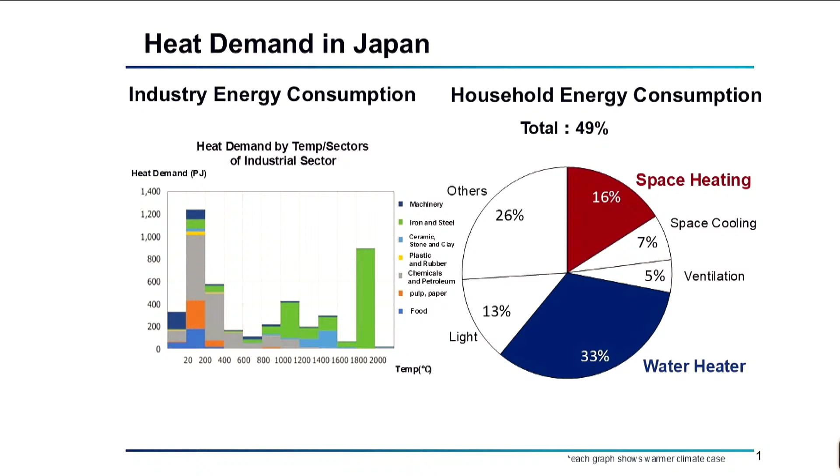Heat pumps not only improve energy efficiency, but also enable a shift from gas to electricity, contributing to the transition to non-fossil energy. Japan is accelerating the introduction of heat pumps through both large-scale budgetary support and incentives, and regulatory systems. So pushing and pulling.

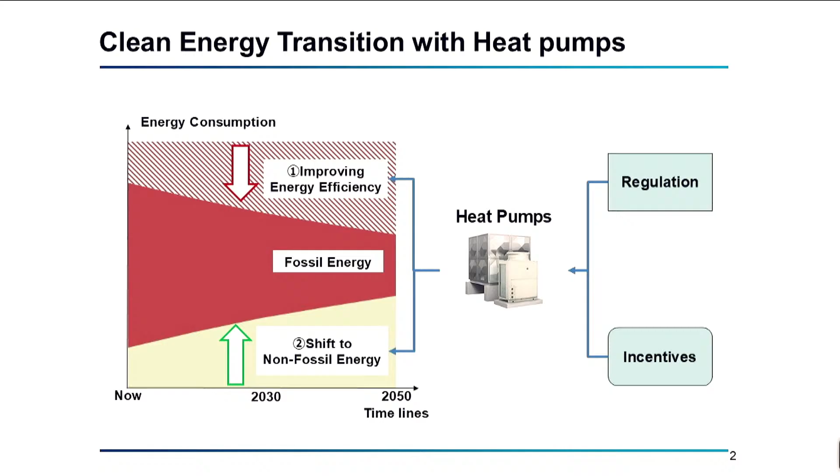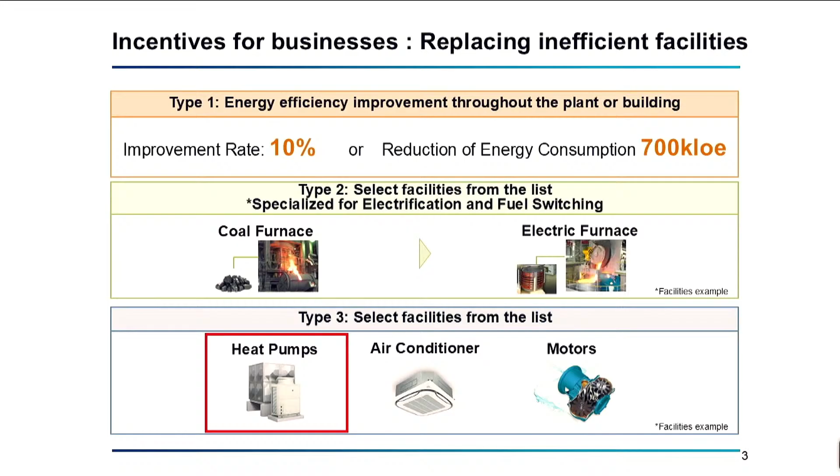Since last year, Japan has introduced governmental support of over $5 billion for a 3-year period. This applies to 3 categories: one is energy efficiency improvement across entire factories, for large-scale investment. Category 2 is fuel conversion, and 3 is replacing individual equipment through support. We encourage investment including in small and medium-sized enterprises, especially using category 3.

In tandem with the support mechanism, regulatory frameworks are important, and we implement the unique Top Runner program. The Top Runner program sets energy efficiency targets and target years based on the best technology of the time. Heat pump manufacturers and importers are required to meet these targets by the designated target year. This is a moving target, so after several years there's a much higher standard as a new goal.

This moving target system is very effective as it stimulates technology innovation. Every manufacturer has to develop something new every day. In the case of air conditioners, we have a record of gaining 30% energy efficiency improvement over the past 20 years.

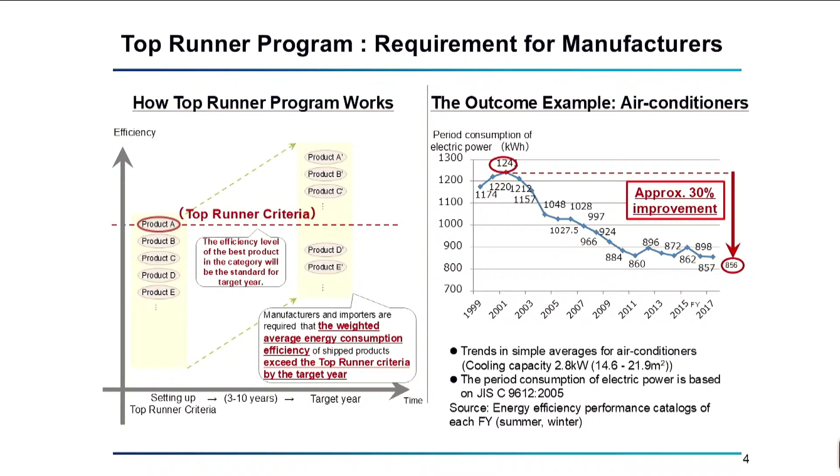Facing rising energy prices, reducing electricity and fuel bills is crucial. We are promoting the replacement to highly efficient heat pump water heaters through government support, and this has stimulated demand. The demand has also led water heater manufacturers to expand their production lines.

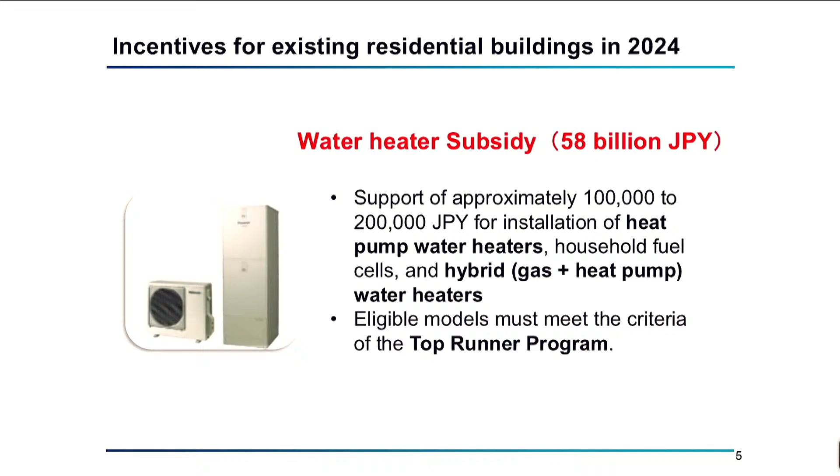We have witnessed a significant shift from traditional gas water heaters to highly efficient heat pump heaters. Today, the share of highly efficient models accounts for 52%, up from 9% 20 years ago. The installed number of highly efficient heat pump water heaters has exceeded 10 million units.

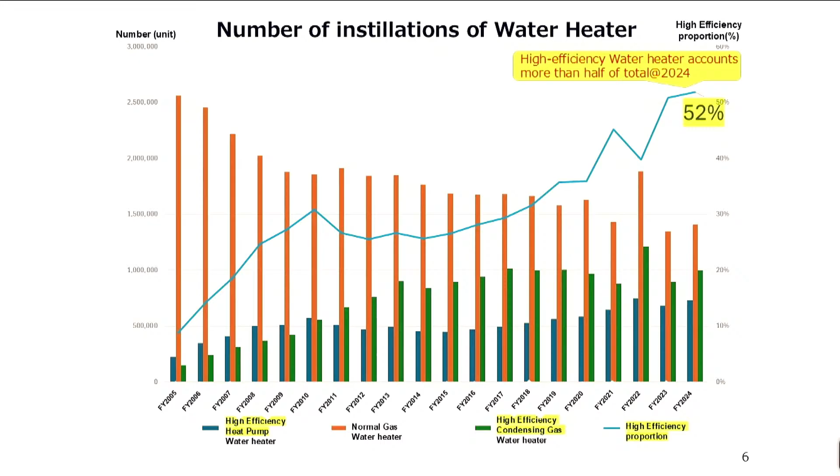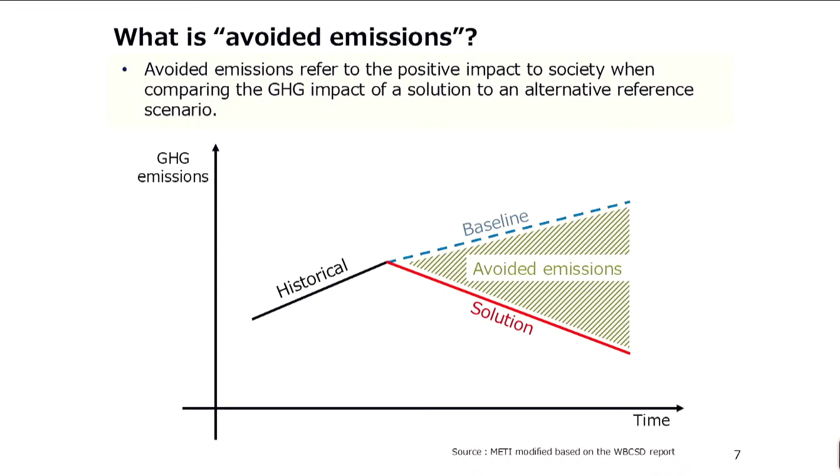Lastly, Japan is working closely with WBCSD, the World Business Council for Sustainable Development, to develop a new emission accounting concept. We call it avoided emission for energy efficient technology, including heat pumps. Avoided emission quantifies the positive impact of greenhouse gas emission reduction achieved by a certain solution compared to the baseline scenario without the solution. Using avoided emission as a new metric will allow companies and financiers to prioritize projects or investments with more reduction impact.

You can see the baseline is the conventional gas heating system. It emits a lot of CO2. If you change to heat pump, then obviously there's substantive emission reduction.

For example, for the manufacturer Daikin, they manufacture a lot of heat pumps, but under the conventional scope 1, 2, 3 mechanism, the more Daikin produces heat pumps, the more activity, so scope 1, 2 goes up. But that's not the value of Daikin - they are reducing the emission of the whole society, the whole economy. This new metric of avoided emission tries to count that positive side, the value of the company.

WBCSD is now incorporating avoided emission with the conventional greenhouse gas protocol, or scope 1, 2, 3 accounting system. Japan supports this initiative so that the effectiveness of energy efficient technology is properly evaluated worldwide. We need an international standard for this.

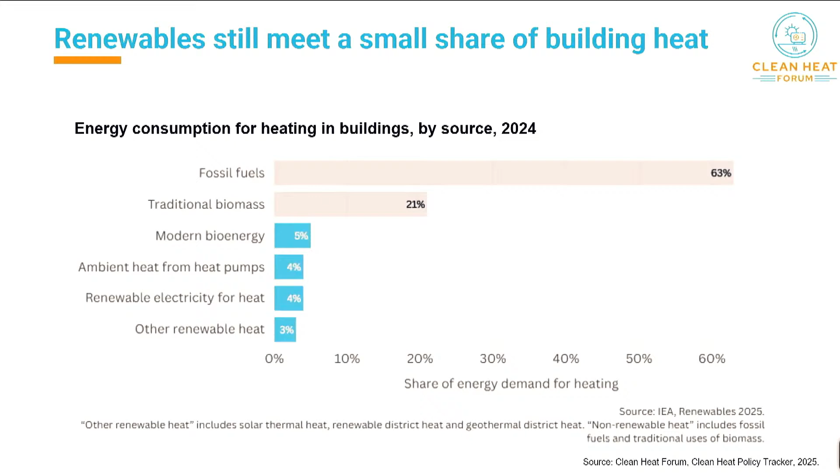We know that there is still a great need to decarbonize heating in buildings. In terms of energy consumption for heating in buildings, renewables still meet a small share of building heat, around 16%, with most of this taken by modern bioenergy. However, a rising share is from ambient heat from heat pumps as they're being deployed around the world. As the share of ambient heat from heat pumps is rising in energy consumption, we know that heat pumps are a key building technology for heat decarbonization.

The IEA found that heat pumps globally have the potential to reduce CO2 emissions by at least 500 million tons, roughly equivalent to Canada's emissions in 2021. You can see this in the chart. Even under the announced pledges scenario from several years ago, heat pumps go a long way towards reducing emissions in buildings.

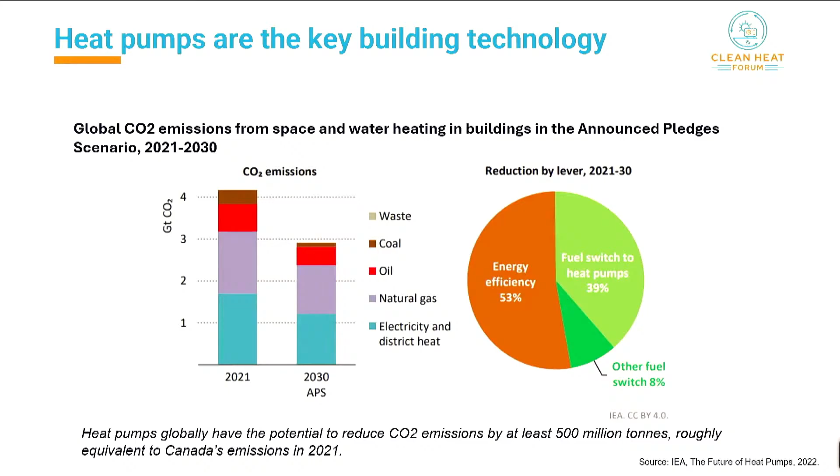The Clean Heat Forum plays a role in this by trying to accelerate the decarbonization of buildings by working with national governments, NGOs, and industry. As mentioned, it was created in 2021 at COP26 in Glasgow. We work on sustainable heating practices and trying to share best practice policy among our members. We focus on making the heat transition affordable and making sure that governments have adequate support to meet a rapid and equitable shift to clean heating.

This year, in the context of heat pumps, the Clean Heat Forum has had two notable outputs that I would like to discuss briefly today. The first is a policy brief on how to make electricity cheaper around the world. This is coming soon in the weeks following COP. At the end of October, beginning of November, the Clean Heat Forum and RAP published the Clean Heat Policy Tracker, the 2025 edition. I'd like to walk through some of the results from this study and talk about how governments are approaching heat decarbonization around the world.

Let's begin by speaking about energy prices. What we know, what we see in trend lines, is that low price ratios tend to lead towards more electrification. A price ratio in this context is the ratio of the electricity price to the price of the fossil fuels used for heating. That could be the ratio of electricity to natural gas, the ratio of electricity to heating oil. It depends on the region concerned.

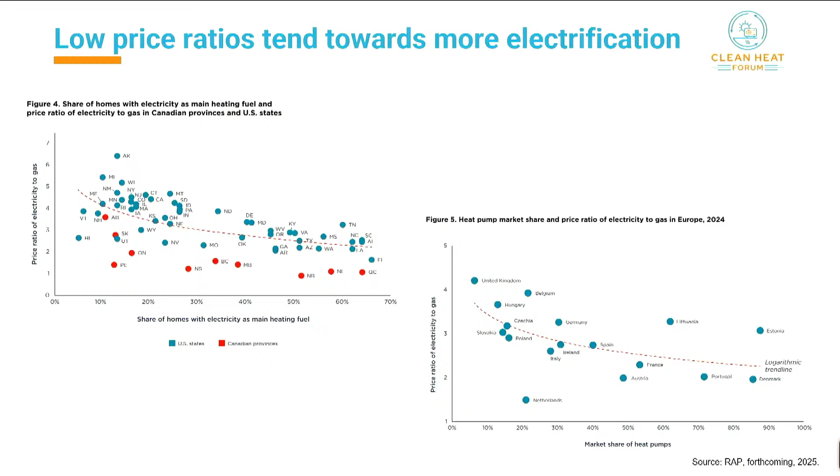You notice the Netherlands here is a bit of an outlier, because the Netherlands has taken strides to greatly reduce its price ratio to boost the heat pump market, which has had good results in recent years. But you can see that's why it's a bit of an outlier in terms of this trend. However, in many countries, the trend holds that the lower the price ratio of electricity to gas, the higher the market share of heat pumps.

This can also be represented in a map. When we look at the price ratios across Europe, again, we can set some boundaries. So we say a good price ratio for electrification is around 2.5, because you know that if your coefficient of performance is around 3 or 3.5, which could be considered standard performance in these European conditions, we know that the heat pump will be a winner on running costs if the price ratio is less than 2.5 almost all the time. Those are the countries in blue.

Once you get between 2.5 and 3.5, it starts to become a little bit less certain whether your heat pump will deliver cost savings. And once you get up to more than 3.5 of an average price, that starts to be where it would potentially be more expensive to run the heat pump. There are ways around this, such as using dynamic tariffs to make sure you're running the heat pump at times of low electricity prices. But of course, the best way forward is to simply reduce the prices of electricity overall, especially relative to gas.

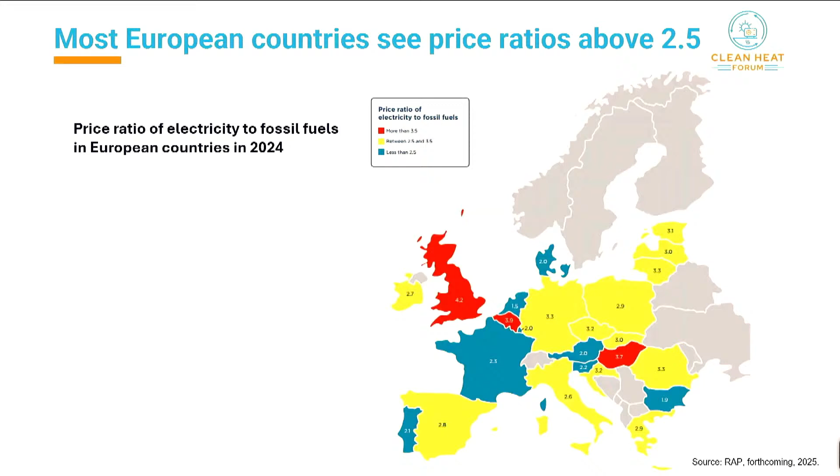For this report on energy prices, we also looked at Chinese provinces, and we saw that there's a great range of electricity and gas prices, but generally the price ratios tend to be very low. You can see on this chart, the highest one is around 3.1, and many price ratios are below 2, certainly below 2.5, almost all of them, with the exception of 3, are below 2.5. So there's a strong economic case for electrification in China.

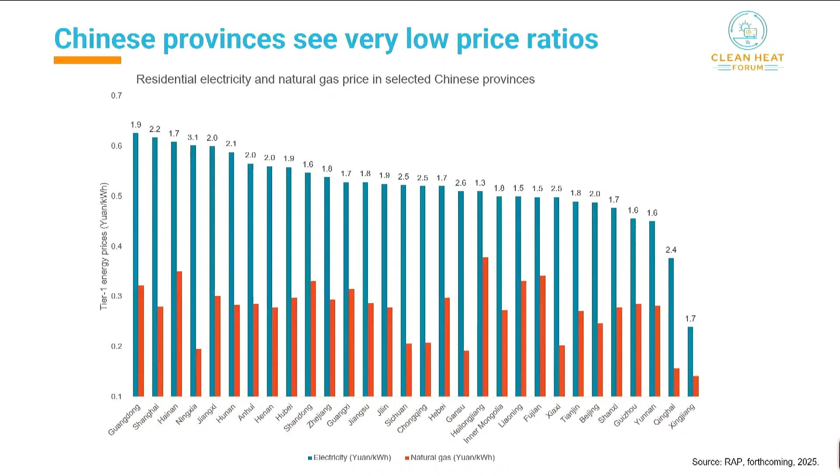That concludes our discussion on prices, and now I'd like to talk a little bit about policy frameworks and work we've done in the Clean Heat Forum on tracking policy frameworks.

We did a review this year of 17 countries, about half of which are in Europe. We also covered Canada, China, the United States, South Korea, and Jordan, in terms of countries outside of Europe.

We tried to see comprehensively which policies are most common in which countries, what strategies governments are taking to decarbonize their heating, and what is the best practice in these policies. So to do this, we did an overview that looks at the general trends.

We looked at policy fact sheets. You can see on the right side here, we grouped them into 5 categories: overall policy framework, regulatory policy, financial support policies, pricing reforms, and communications. We tried to highlight some of the best practices from the 17 countries we reviewed, so that any country looking to dive into heat decarbonization can turn to this policy tracker to see some of the best practices from around the world.

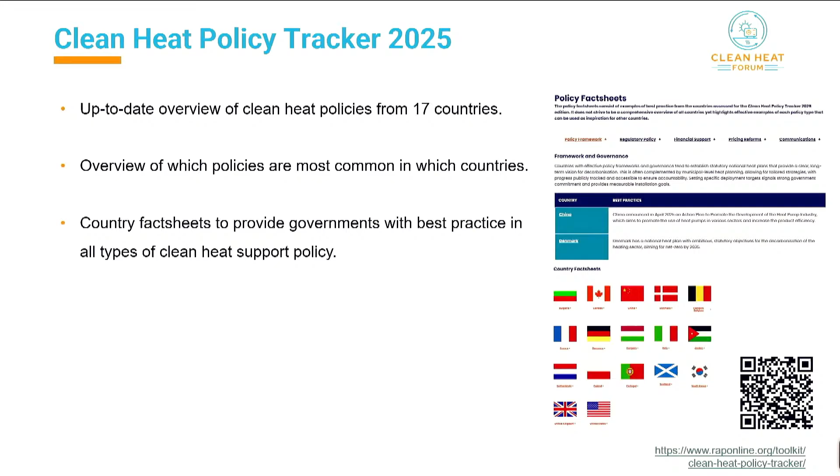When we look at the results of our survey, we find that subsidies are the most common policy lever. Indeed, in almost all countries, we see some sort of subsidy for clean heating in place, whether it be heat pumps or district heating, or different technologies which don't feature here but can be understood as part of the clean heat portfolio. Many countries also have communications campaigns that try to improve public understanding or track heat decarbonization publicly.

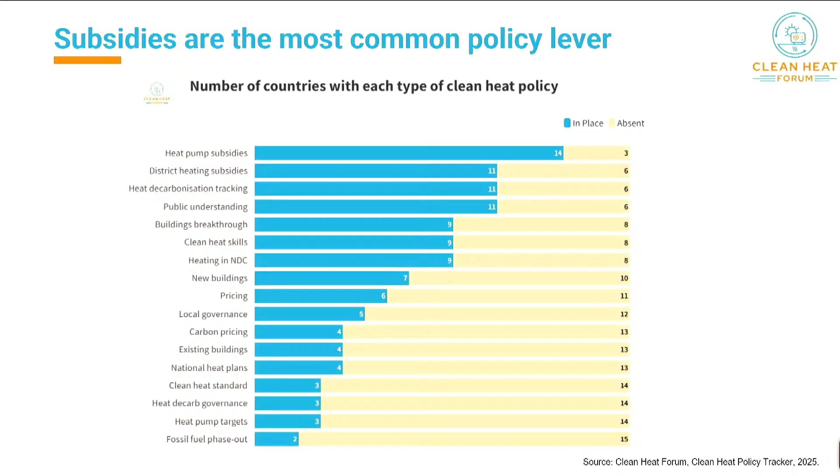Yet, as we go down the list, we see that we're lacking comprehensive frameworks for heat decarbonization. Not a lot of clear and binding targets for fossil fuel phase out or for heat pumps, lack of clarity on heat decarbonization governance, a sort of national heat planning. It's really mainly dominated by subsidies.

So when we look at this in terms of the 5 categories I mentioned earlier, we can see that financial support, as mentioned, is by far the most common. Governments are keen to provide these incentives to try to bring down the upfront cost of the technology, but they're lacking the strong regulations to make sure the technologies are being taken up, or the sort of frameworks and long-term vision that can guide the sector, guide investments, reinforce the industry, and encourage households to make these sort of investments.

And we don't see much action on pricing reforms either. As mentioned previously, we have a lot of very expensive electricity in different countries around the world. We have gas and fossil fuels that remain cheaper. The price ratios are not good. In many cases, carbon pricing is not in place. These are long-term strategic mistakes that countries will need to rectify if they want to see quicker decarbonization of heating.

So to conclude, we know that heat pumps are the key heat decarbonization technology in buildings. They will be a heavy lifter in terms of getting us off fossil fuels and how we heat our buildings. The approach by countries is largely still to spend money to provide incentives and let the industry figure out the rest. We don't think this is a great approach because it's lacking the long-term vision and structural support that's needed for the industry to have confidence in its investments, and for households to be encouraged to make their own investments.

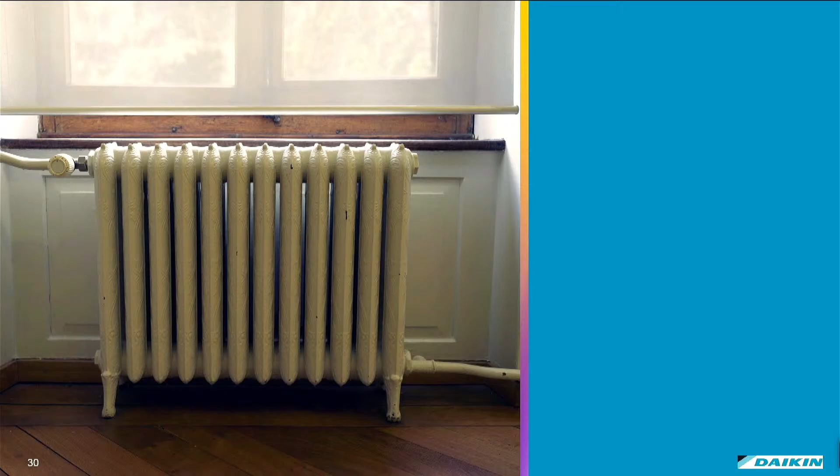As we all know, Europe is often referred to as the old continent. If you go to the next slide, we can see why that probably is also the case within the building environment.

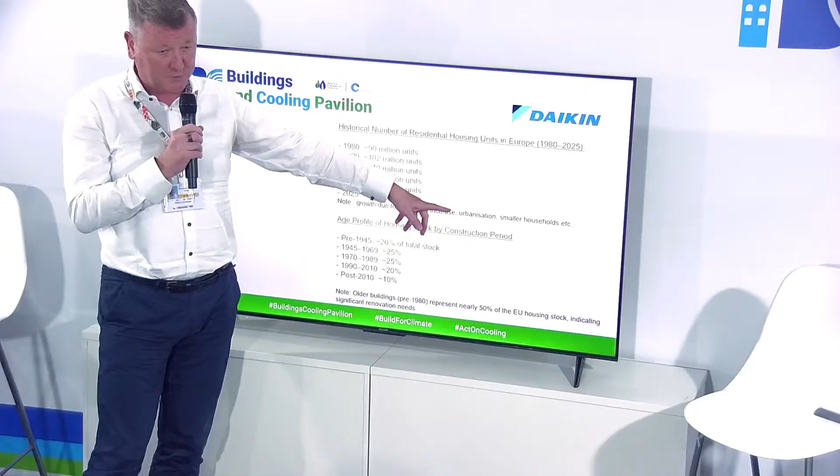We have a range of population that is growing, a historical number of residential buildings that is growing. In the 1980s we only had about 90 million residential dwellings, whereas by 2025 we have almost 250 million residential dwellings - these are separate houses, apartments, really the total overview. Mainly due to population growth, urbanization is an important factor, and smaller households are becoming more and more popular - one-person, two-person households - whereas before, in the 1970s and 1980s, people were living 5, 6, 8 people all together. This is really not the case anymore.

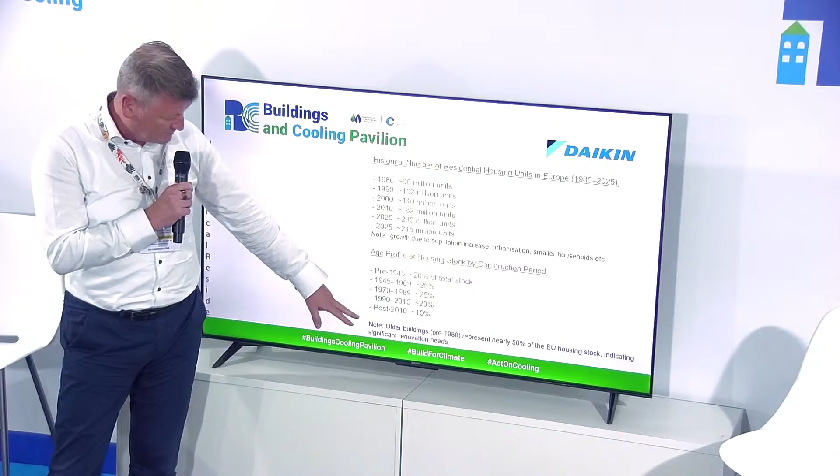This translates into a very old building stock. You could see that almost 50% and more of our buildings in Europe date before the 1980s. Now, to be honest, most of these buildings along the lifetime have had some kind of renovation, otherwise they wouldn't be there anymore. But nevertheless, it is an old building stock, especially since post-2010 only represents 10% of our building stock. So we will have to do mostly work on renovation.

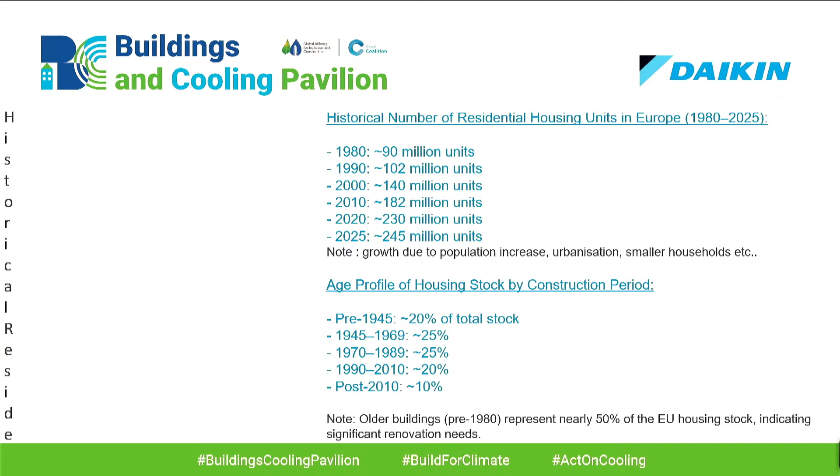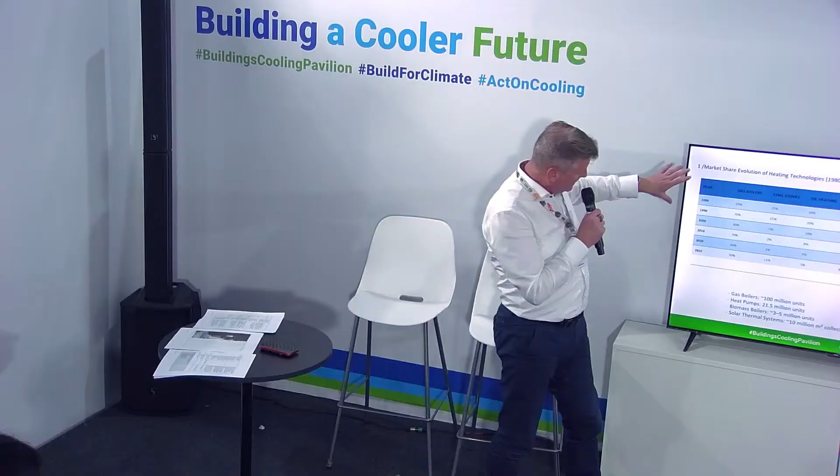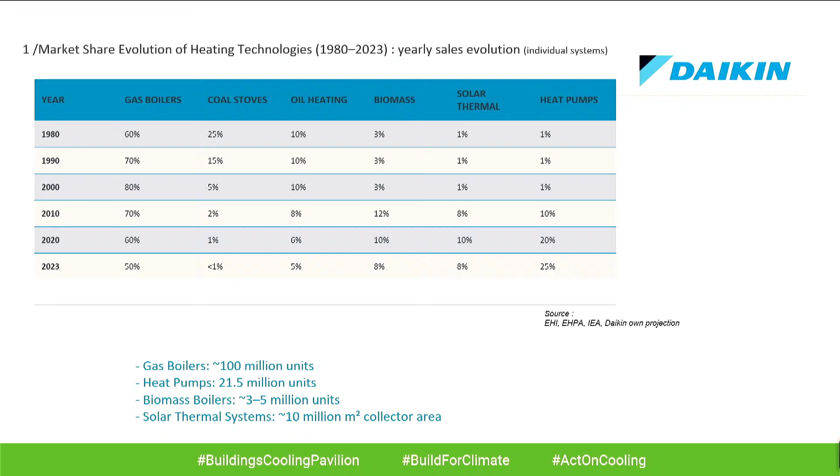Over the years we do see a gradual evolution in the type of heating systems being used. If you look from the 1980s onwards, pretty much gas remains more or less stable - it goes up a little, down a little, but the overall tendency is stable - whereas heat pumps are growing, but are mainly replacing the high carbon intensive fuels like coal stoves and oil heating. We are not yet tackling very much the existing stock of gas boilers.

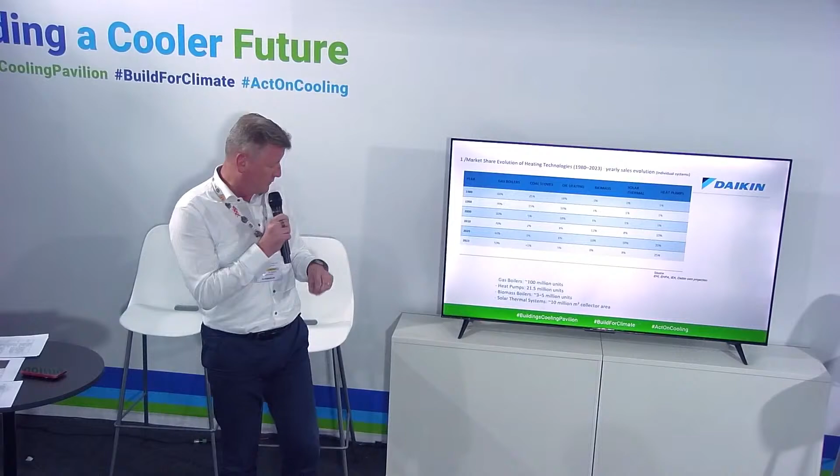That translates into these numbers: we have about 100 million gas boilers running in Europe at this time, and about 20 million heat pumps - these are air-to-water and air-to-air heat pumps, mostly used for heating, so that's the combination of those two numbers. Still about 3 to 5 million biomass boilers, but altogether the challenge remains in how we get rid of the stock of mostly old gas boilers. This is our main challenge.

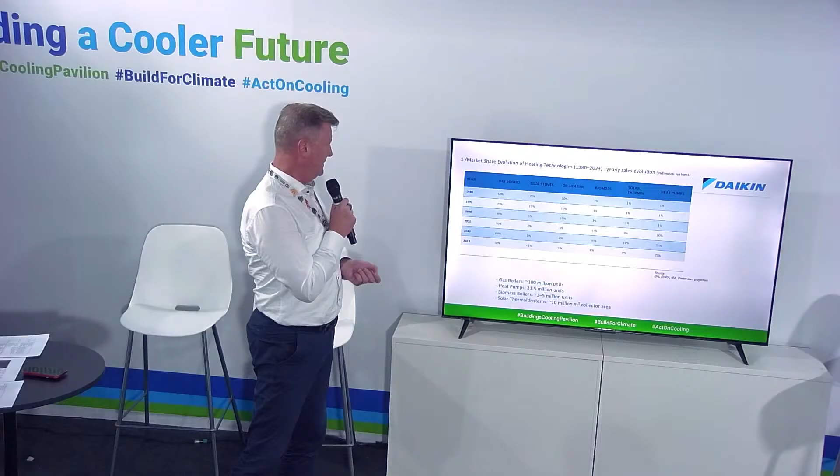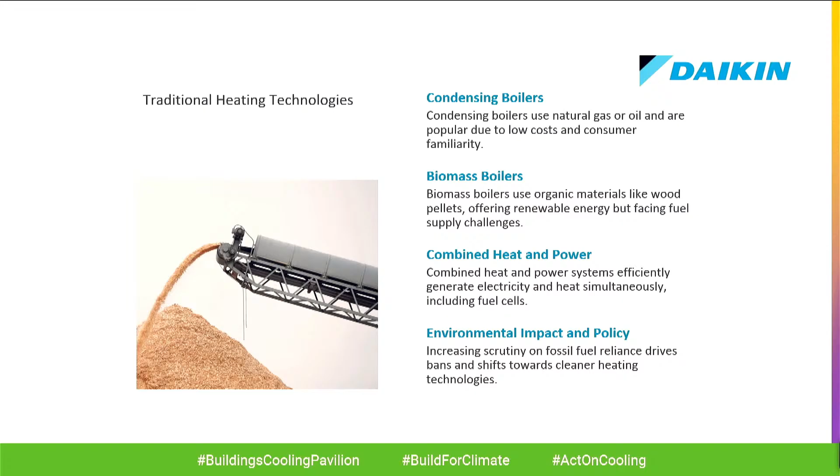Let's look at the technologies and tendencies we actually see happening today. We have the traditional heating systems, which nowadays are mostly condensing boilers, and within Europe you hardly can sell non-condensing boilers anymore due to legislation. We have biomass boilers, and a small level of combined heat and power units. This has an immediate impact on the scrutiny towards these technologies and how we can achieve these predominant technologies becoming more carbon neutral.

There is a way forward - some of these systems in time could rely on cleaner fuels, but this is a tendency which is very long term and we really don't see too much happening at this present time. Next slide is then the evolution.

We do indeed see a shift towards more sustainable heating - gradually a shift from boilers to sustainable heating and heat pumps, but it goes very slow, and this is the main challenge we are facing. Europe has climate targets, and already this week here at Belém, the EU Commissioner confirmed that these targets are in place, remain in place, and are not to be discussed. So this is a very clear message that Europe remains committed, but there are also economic and market factors we need to address, as already highlighted before by the person from RAP. We have problems with gas prices, electricity ratios, which are not always in favor of moving in the right direction.

This is indeed the gap between electricity and gas which is, in most cases, creating one of the bottlenecks. We'll come back to that later.

An interesting factor we do see happening, also highlighted in the previous presentation, is the move towards more smart systems. Even if the gas to electricity price as such is not interesting, if you have a smart tariff, if you can use your solar panels and batteries, you can have an integrated system that, despite all of that, can still be an economically viable solution for the private end user.

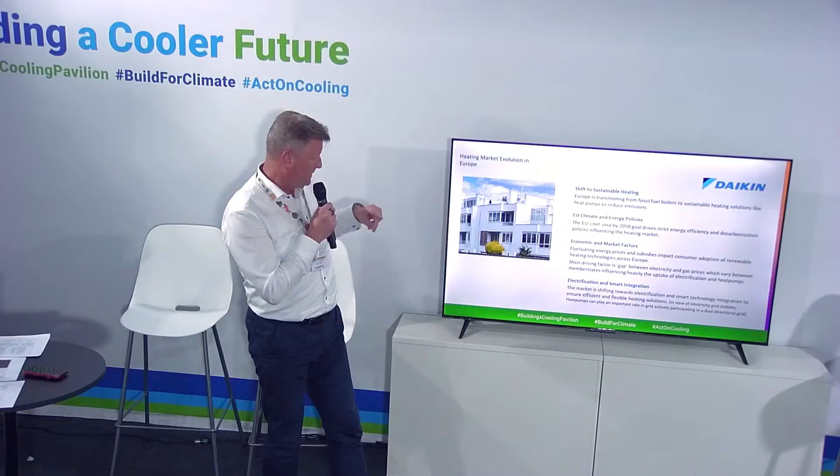Next slide. So indeed, we do gradually see a boiler market decline. We see over the last couple of years a decline of 4 to 6% of boilers on a yearly basis, which is okay, but it's too slow.

So the call is really towards stronger interventions by governments to push more towards the electrification of heat. We do see a small but relevant move towards electric boilers, which we also need to take care of, and I'll come back to that at the end of my presentation. If the electricity price at the end of the day becomes too low, people are also not interested to go to efficient solutions anymore, because it's not cost effective enough to invest in an efficient system if the electricity price is too low. We have data on that later on.

Next slide. Then let's look at heat pumps. As said often before today, heat pumps are on the growth. We do see market growth, however, it's not going fast enough, and we've seen major setbacks over the last years. The data that comes later will actually prove that.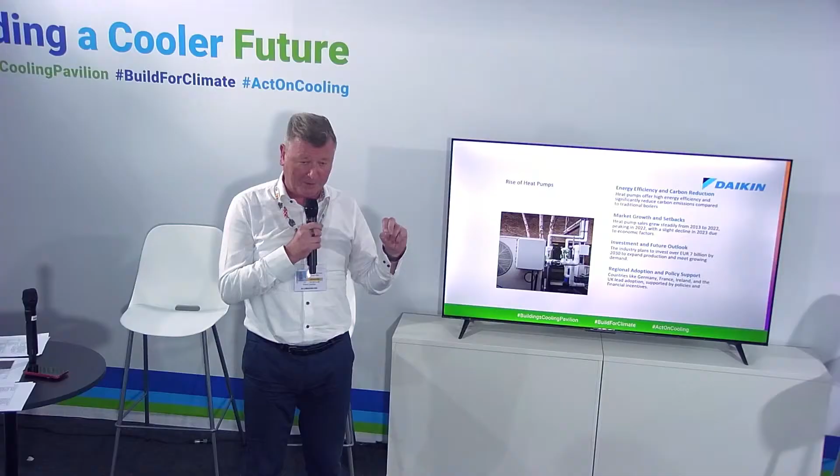We do need further investments, and in the Europe area, most manufacturers have committed immense investments in building up the capacity. So it's not about production capacity, not at all - it's really about rolling out and creating the market, which is now at stake.

Let's also look at air-to-air heat pumps, a sector which in Europe - probably not here in Brazil, but definitely in Europe - is often forgotten as a way forward. We do see coming up more and more, also in Europe, the need for cooling, hence the combination between heating and cooling systems together. It will always remain impossible for a boiler to cool, so it's always a discussion that if you do go for a heat pump, you have the two systems at the same time. At that point, the air-to-air heat pumps become a crucial factor in actually making this happen, combined with advanced technologies, the introduction of inverters and VRF systems, which allow a bigger scale-up of air-to-air as a way of heating and cooling our buildings.

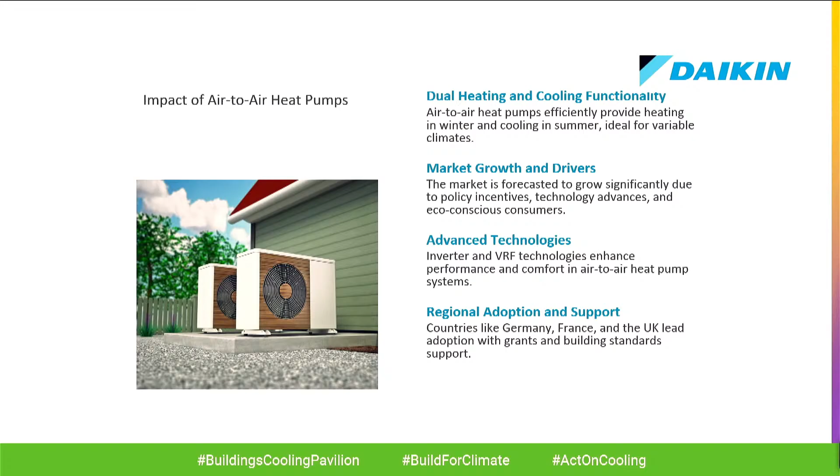Next slide. So yes, cooling demand increase is there. We see more and more longer summers. We have the effect of urbanization and heat islands - this was also discussed here at COP with Beat the Heat. It's one of these elements that is definitely in there. Overall, the HVAC market is growing, and we see a move towards more efficient cooling systems.

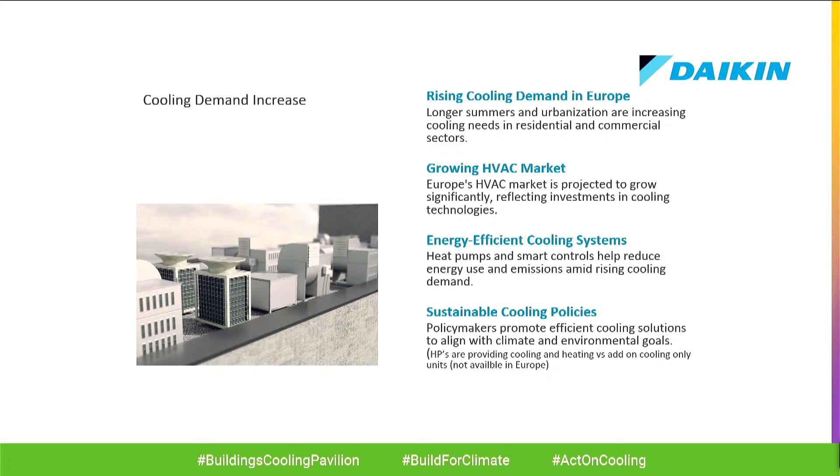Next slide. Now let's look at the background and the future outlook of what we can see. Next.

This is not coming through very clearly, I'm afraid. This is basically showing the efficiency levels between the different systems, and it's putting it very clear that there is no discussion about the fact that any heat pump is at least 2.5 to 3 times as efficient as a boiler. The more you go up the scale, you can go to heat pumps that are 4.5, 5 times more efficient, but in most cases you don't have to go to that level to make it economically feasible. So what we are saying is try to go for a system that is affordable to make sure the rollout goes fast enough.

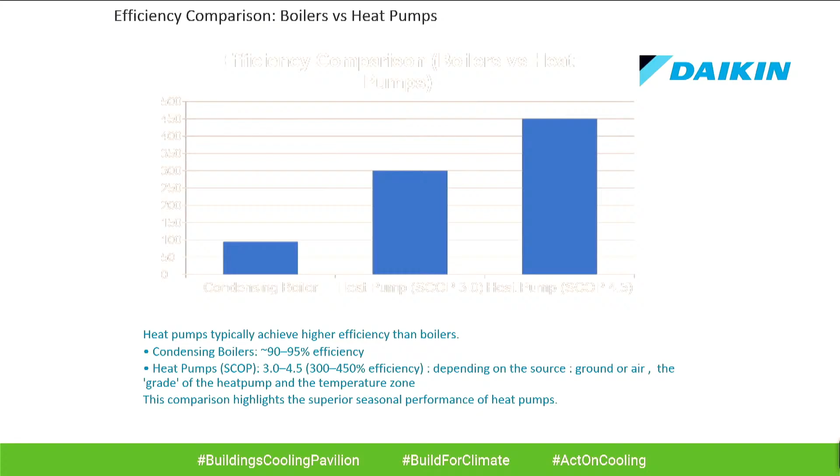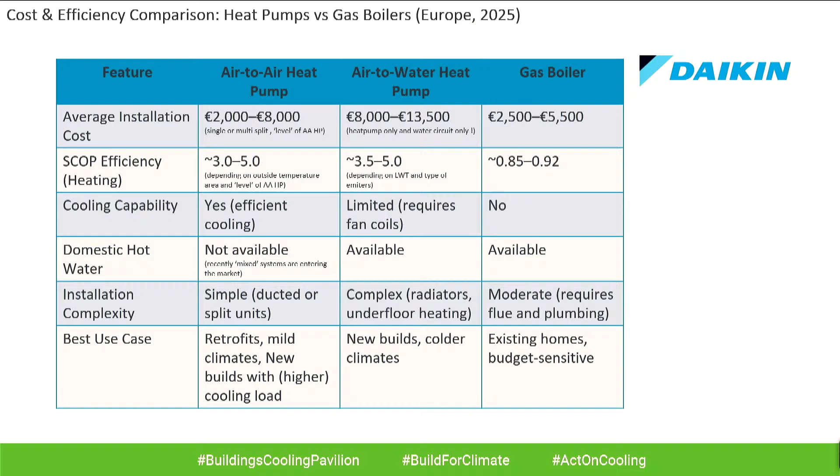Next slide. If we look at cost, and this is often the elephant in the room, yes, indeed, heat pumps are more expensive - there's no two ways about that. If we look at the different systems, a gas boiler in Europe goes somewhere between 2,500 and 5,500 euros - that's an awfully big spread, also to do with the countries, as there's a big difference in pricing by country. An air-to-water heat pump traditionally will be about 2.5 to 4 times more expensive than a gas boiler. The main point is that air-to-air can provide a cost-effective solution in quite a number of cases, especially if we are looking at cooling. So towards the southern part of Europe, we really believe air-to-air in combination with cooling can provide a solution.

What we are seeing more and more, and potentially even more important, is what we call mixed systems. We do see mixed systems coming into the market where air-to-air units are providing at the same time air conditioning, cooling, but are also providing hot water. It's these systems that we do see gradually picking up more and more pace in the market.

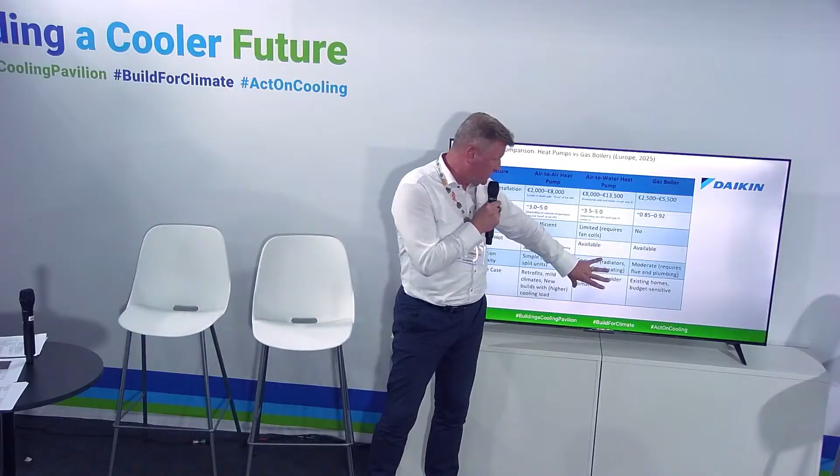It can be used in retrofits, whereas air-to-water heat pumps quite often are used towards new buildings because of the infrastructure that is needed and so on. Whereas gas boilers traditionally remain mostly used in existing buildings. And again, this is the main target of decarbonization over the next 5 to 10 years.

In fact, in some countries today that is the case. For the first time in Germany this year, there are more heat pumps being sold than boilers. So it is starting to happen. However, we do have to take care of these ups and downs in the market.

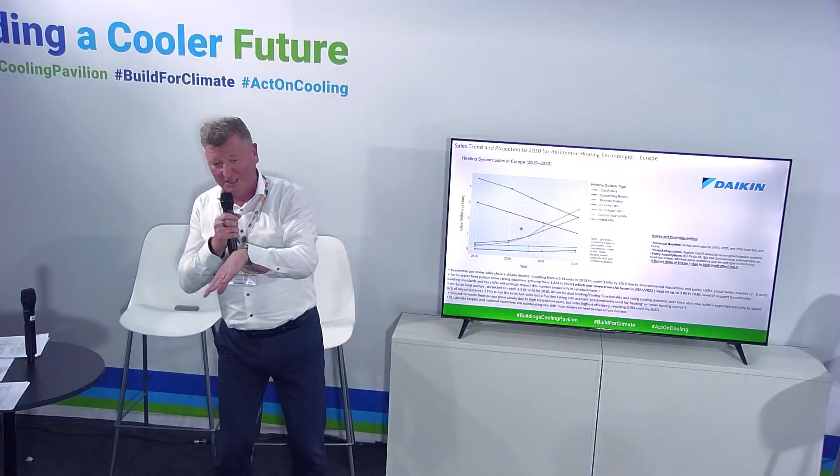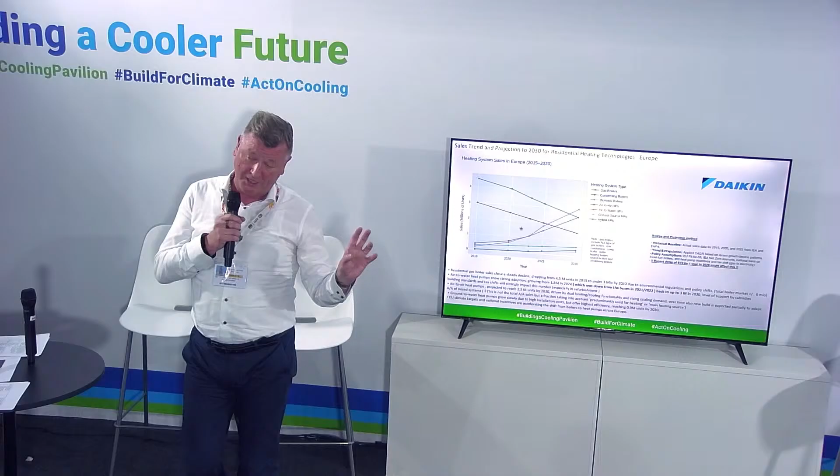That's what we see here. It's nice to show a growing and continuously growing tendency. Nevertheless, we have to make sure that these spikes that we had during the 2021-2022 period, where suddenly there was a boom, everybody thought it's happening, we are on track, and finally, because of gas prices going back down again, the market collapses. Yes, now we are approximately 3.5 to 5 years behind the original intention of the European Union. That's also recognized. It was said with so many words earlier this week by the European Commissioner in Belém, saying that decarbonization of domestic heat is one of the sectors which is falling behind the targets.

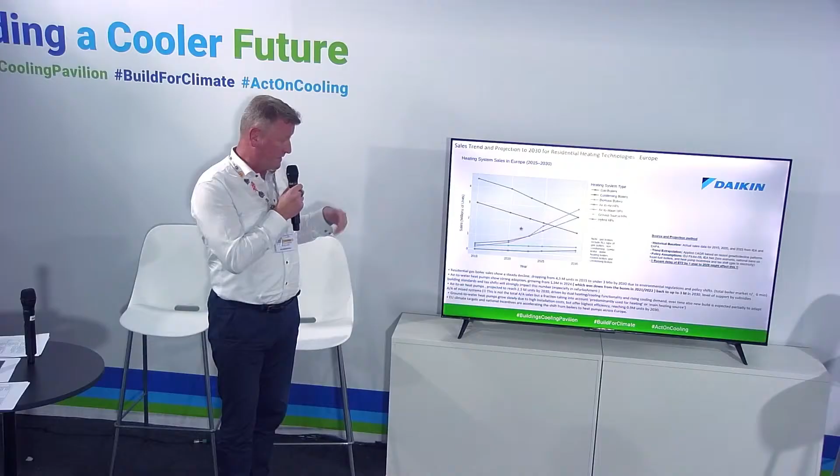So next slide, please. I will need to finish up. Let's skip this. Next slide.

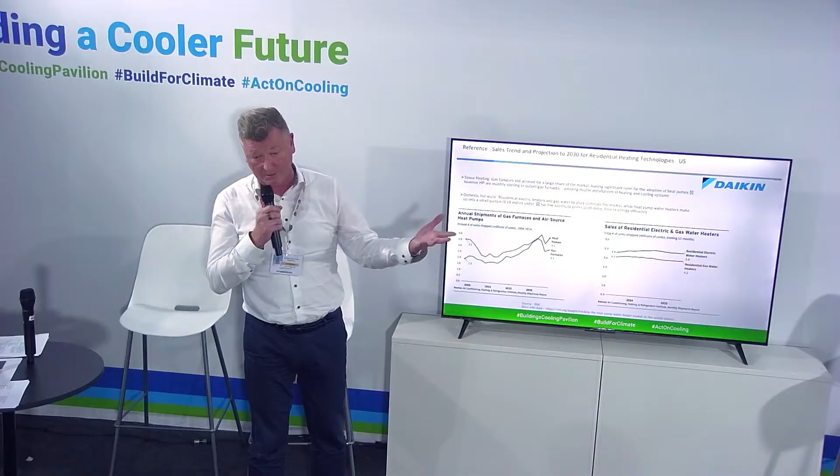Next slide, just to conclude. As a conclusion, we do see the market transformation. We have an enormous potential to decarbonize the current building stock. New builds are basically on track. Regulation is there and we do build more efficient and carbon neutral buildings. There are policy asks, and I think we will go back to that during the panel discussion, but clearly integrated solutions and different types of heat pumps are the way forward. Thank you.